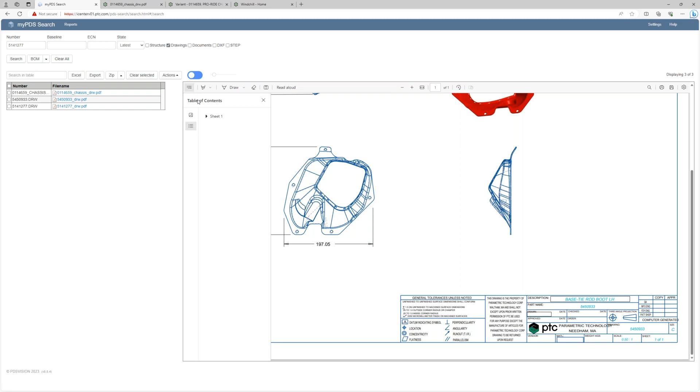From this view, you can choose to print it if you need it, or you can save it directly. If there are multiple sheets to it, you can jump in between the different views on that. And so it's a simple way to view these drawings directly and easily toggle in between the ones you have collected in that table.

Apart from adding a single number at a time, you can use various types of filtering, like semicolons to do multiple searches at once, searching two numbers at a go, or you can use various types of wildcards like an asterisk or a question mark to search for all drawings starting with 153826.

So quickly you could build up a search result that you need to view directly on screen, or perhaps export. If we walk over to the left-hand side here, we have the zipping functionality. This allows you to multi-select everything in the current view, or deselect and make a sub-selection of specific drawings you'd like to retrieve. By clicking on the zip file, we generate a package, and once downloaded, we open it up. All of the drawings you wanted to retrieve are available in one click of a button.

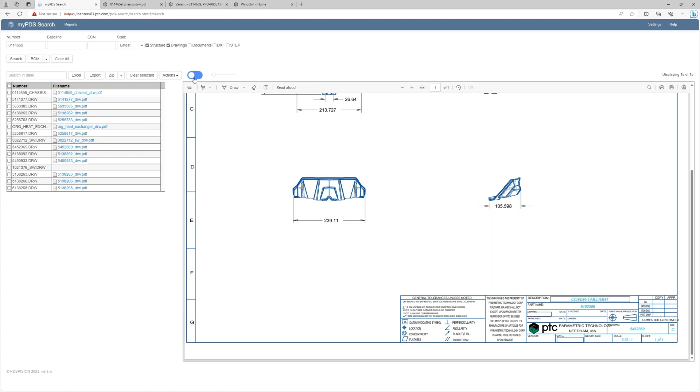An additional way of searching that has been very much based on feedback from end users is that they work extensively with Excel. This could be reports sent from external parties, generated from an ERP environment or other types of systems, or simply a list that they build up because they need to collect a set of drawings to send to a certain external party. This is a very simple example with only a couple of rows, but perhaps we can say that we need to collect all of the drawings for these two components.

I could, since they aren't that many, provide a string of this or input one by one into the numbers field to build up that table, just as we did before. But if this list is in the hundreds, it's still going to take you some time. So instead, we provide you with the ability to grab hold of that Excel file, drag it onto the screen, and let go of it. At this point, we will parse the content of that file, displaying the same data as you saw previously.

But there's really no way for us to tell what column holds the information you want to search for, so you would have to choose what column we're targeting. You can select all of the rows, or choose a subset. Click OK, and the selection now in the numbers pane will be a selection from file, so the input is coming from what you entered. From here on out, it's just the same as before. We can choose what files we want to retrieve, apart from the PDF for the drawing representation, perhaps also the step files. I can choose search, and we will perform a search on those numbers from the Excel.

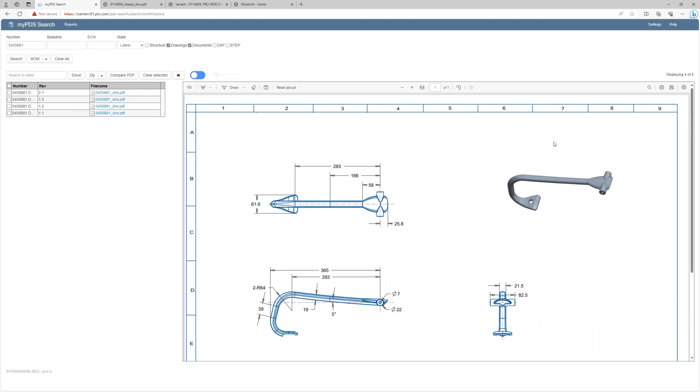Even for a simple detail like this one, it can be kind of tricky to find the changes sometimes, even if you do have a change table in your drawings. So by selecting two of these drawings and choosing Compare PDF, we will take these two PDFs and put them on top of one another to color in any of the changes made in between these two versions. As you can see here at the bottom, it's pretty clear that the diameter of this hole has changed in between those two versions.

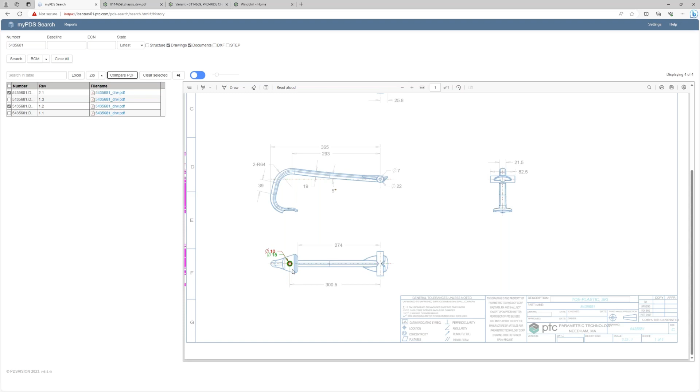Clicking once again on the 1.2 version, for instance, will show me what that specific version looked like, and I can at any time go back and look at the latest version and see that change very clearly. So it sort of speeds up the process to find that change in between two drawings, for instance.

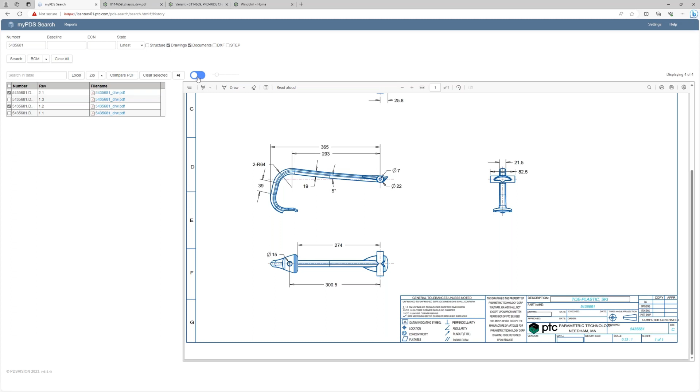Other types of actions that are available, for instance, if you are working with the change process, we have the capability of filing a problem report. By selecting one of those levels where we found an issue, navigating over to the Actions pane, creating a new PR.

This will show the input fields required to file a problem report. The user will see the affected objects if performing a change on this selected item, the objects affected by this change, and the affected end items. You can also drag and drop any document or images describing this problem before filing.

This will then take the same route as if you're filing a problem report within Windchill. This is a great way of having users from this UI also being part of and contributing to the change process within Windchill.

This also works in the same way to create an ECR, for instance, if you're not working with the problem report specifically.

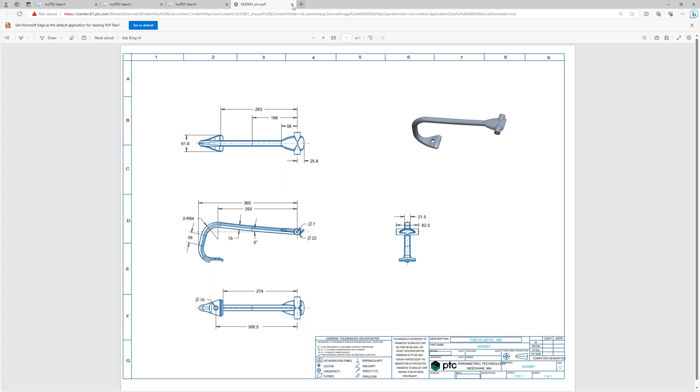You can use these actions not only to display the drawing, but also to show, for instance, once again, the Creo View model, or generating one of those bill of material views based on that specific input from the beginning. So that's just another way that you're able to utilize this product as well. I'm just going to finalize this a little bit on the slides page.

And today, as mentioned, we have probably about 100 customers using this already. And from what we hear from them, this really enhances the daily productivity. It gives these user groups their own way to gain access and interact with Windchill, and it saves valuable time for the R&D team that can focus on their task of the day instead of becoming a service for other parts of the organization. It really improves the quality by always retrieving the latest accurate data directly from Windchill. And it's a huge time saver when it comes to automating these repetitive tasks.

So with that, I hope you have gained some input on what this product is and what you're able to do with it.